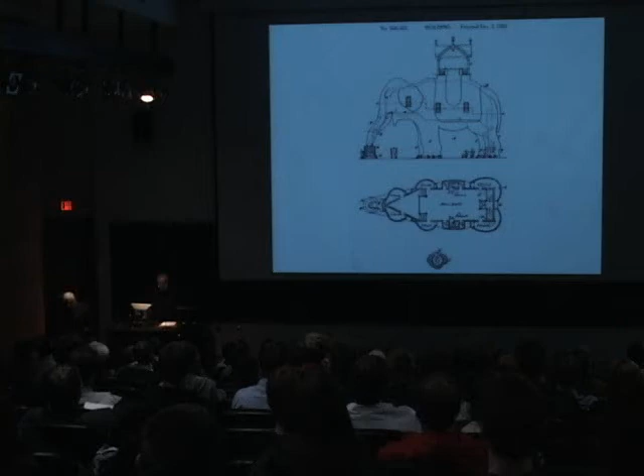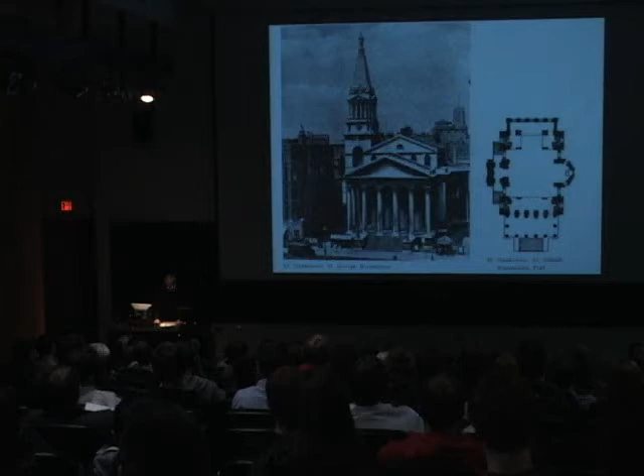And the keystones, just to mention a few of the elements. The density is undeniable as they're all vying for the same place. The action is also severe as the temple is skewered by the church. The triumphal arch is squished by the treasury and the pyramid. The church walls are bent. The temple walls are compressed, and the center is popped up—so there you see the center being popped up. Even the keystones pop up.

If we look inside, we see all the issues again: the horizontal of the temple running this way, the vertical of the church running that way, the compression of the church. So we see the nave windows, which are bent around the corner because the church has been compressed that way. And in case we don't really believe it, we also get the reading of the temple on the ceiling, with the nave and the side aisles in the piece of stucco.

Underneath that piece, Chareau's Maison de Verre is the same game, different stuff. This time it's industrial stuff that has been manipulated and jammed into the corner under an existing third floor. It's a frozen Chinese puzzle of L's. Like St. George Bloomsbury, the bits often act in more than one scenario. For instance, the service wing is both the front facade bent around the corner and a piece of apparatus pulled from the house.

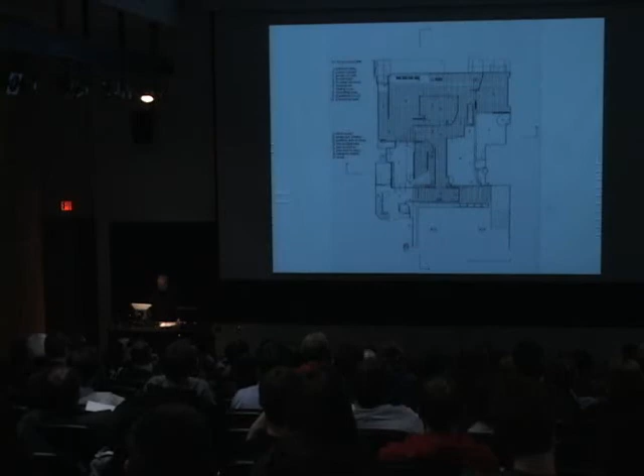However, the real story lies in the difference between the translucency and transparency, the making of a symbolic city, the utopian projection of industrialized standardization, the development of an architectural vocabulary, and the illusion and actuality of mobility and the ultimate machine for living.

With Venturi's mother's house, the stuff is reduced to an eclectic array of architectural elements jammed together. The picturesque house front, the chimney, the dado inside and out, the graphic arch with the traveling window, so this window which has been relocated from over there, the strip window, the large and small punched windows, and the picture window. The picture window is this big window back up underneath the entrance.

On the back, the Roman window on top and Raphael's Palazzo shop fronts and the modernist voids, the suburban sliding doors are further indication. The stair to nowhere, the garret attic, the oversized fireplace with too thin mantle, and the compressed stair, the offset front door, most of it in motion. They are elements playing in multiple scenarios, packed in, slipping, and sliding.

The Kimbell Art Museum is at once the Baths of Caracalla and a railroad yard, Versailles and a Texas warehouse. If we understand manipulation as a kind of organization, the Kimbell has it in spades. The repetitive vaulted spaces are anything but: chopped, compressed, emptied, and dropped. Front to back, the ABA represents the old. Side to side, the 120-foot span is all about the new.

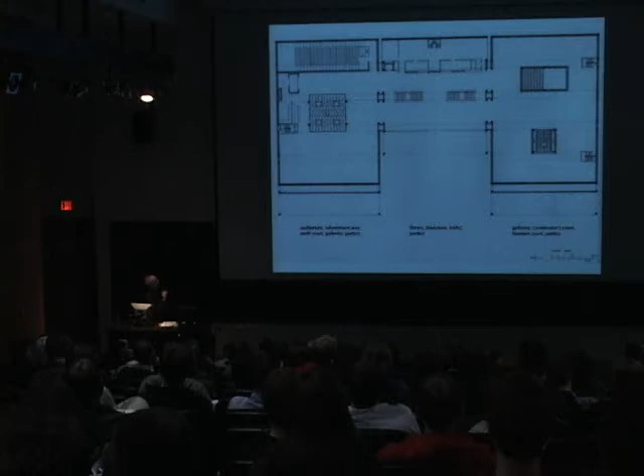The courtyards are another elaboration. Objects in a field, small, medium, large, extra large, compressed and stretched, all glass, no glass, half glass, single and double story. So the courtyards are small, medium, large, extra large. There's the glass on two sides, solid all the way around, glass on all four sides, and sort of open. So again, the whole sort of elaboration of them. Service and served are at once adamant and blurred.

Stirling's Stuttgart Staatsgalerie is all about shock, a history of architecture, the eddy effect, center to edge, front and profile, big and small, grand and informal, bent bars absorbing the neighborhood, and dare I say, the Rockettes. The multiple centers, the folded walls, and bits of context absorbed, the historical puns all contribute.

Then there's the separate routes, the two routes for the neighbors through the site, the promenade along Adenauerstrasse, the entrance processions to the museum and the theater, the museum procession with attachments or exits, the garage sequence of service routes for the museum and the theater, and the curtailed administration and cafe accesses. So, they're basically jammed into the plan.

But for instance, the sequence from the street up to the museum entrance, and then through the museum entrance, up the ramp, round to the galleries, and then back around that way would be an example of the elaboration of a route.

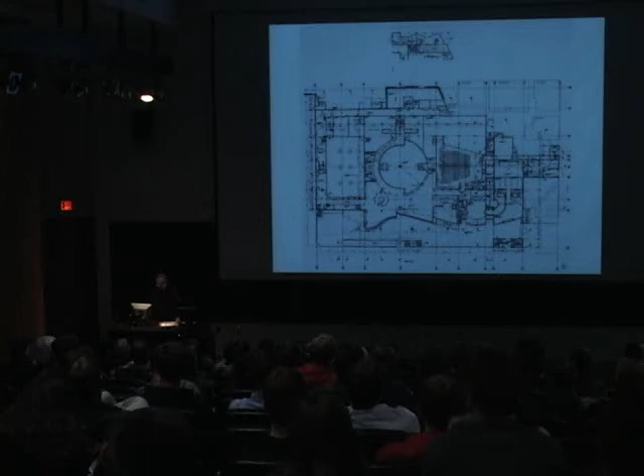Koolhaas's Villa dall'Ava continues the themes of density, action, and logical consequences. For density, it is at once a chopped-up Villa Savoye and a country estate packed into a Parisian suburb with a house and garden overlaid on each other, and the conjugation of elements or episodic essays, for instance, the stairs, which come in many different forms.

For the action, there is the geological shift. So we get the sort of stone layer, underground river, and then a dirt layer with the roof garden on top. The side-to-side compaction, the front-to-back slippage, and the garden wall, just to mention a few. So for instance, this is the garden, or the way the house really works from city to garden is this way, with this wall which has been wrapped up around, little garden door back behind the wall here, moving that way.

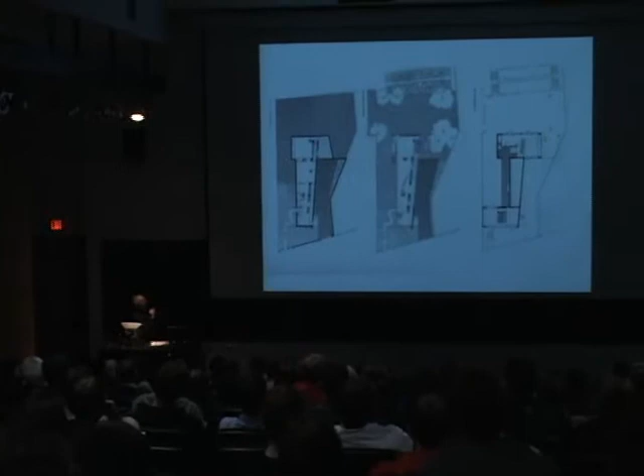For logical consequences, there's the deceptively simple plan with the living bar, the two bedroom wings, the transformation of the ABA to an S diagram, the balancing of the push and pulls. So here is what would normally be two wings or two pieces which, pulled out here, have been slipped this way, transforming the ABA into an S diagram.

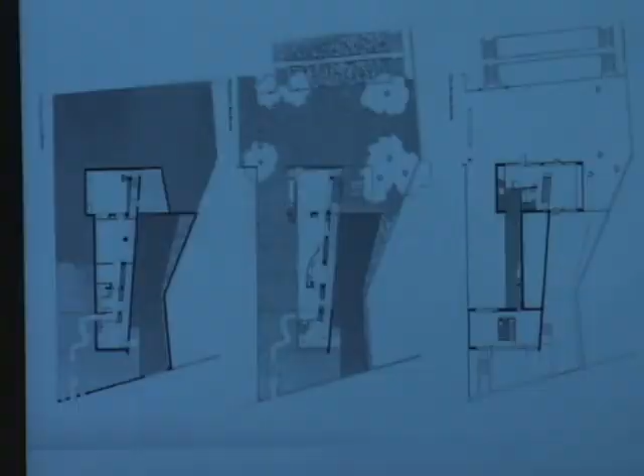And then finally there's the simple, inexpensive applied materials both to articulate the differences and make the house accessible. My work continues the themes, or this way of seeing the world.

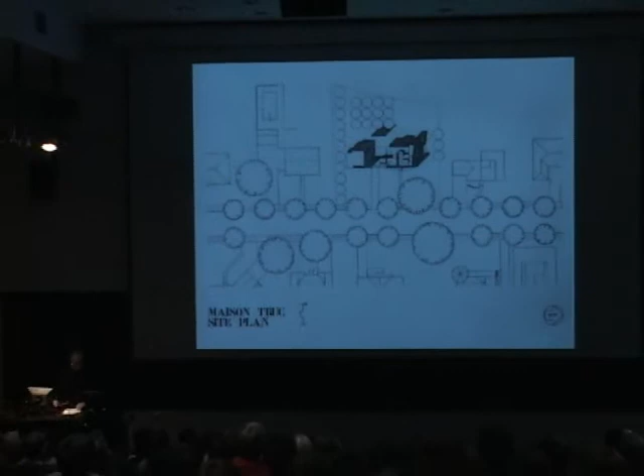Design is a prototype. This was a house done in the 70s. At the time, Corb was big, so these are the letters that Corb used. Truc, objects were big, so everyone was talking about objets in French. But in fact, truc means trinket, so it's a sort of crummy little object.

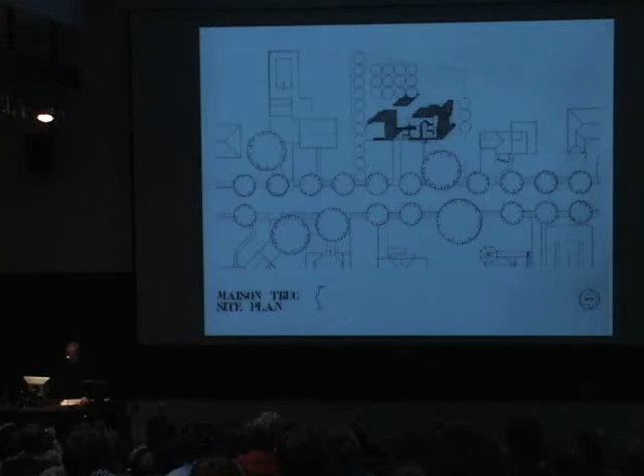So Maison Truc is all about that. Designed as a prototype for suburban living, Maison Truc reevaluates the optimism that accompanied the early 20th century industrialization. The modern movement presumed an impending revolution in domestic life that failed to occur. And with that failure, the utopian idealism of those years had to come to terms with a prevailing cultural disposition towards an easy way. The benefits for the whole were replaced by a misguided conception of individual freedom.

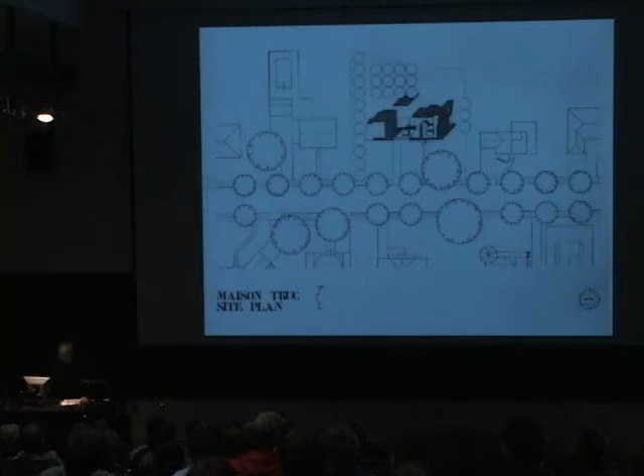The image of the truck updates earlier romantic images of trains, boats, and planes. Technologically ordinary rather than new or outstanding, the truck admits to no ideal. It's just a pragmatic way of getting something from here to there. However, as perceived on the open American road or as applied to the house, it can be mined for its elemental quality. In its most literal sense, the truck is a representation.

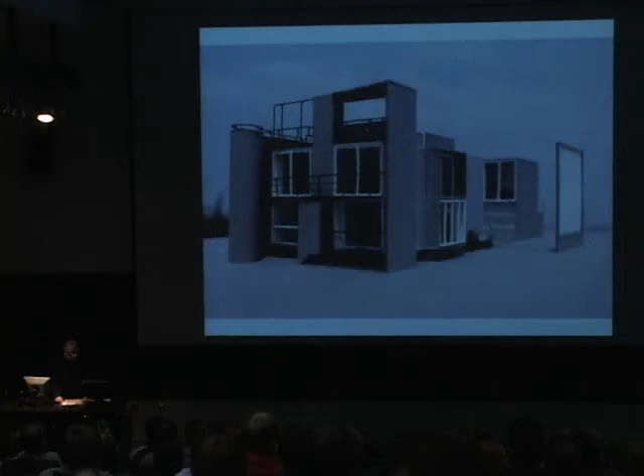The truck is a representation of portable space that is cheaply mass-produced. Independence is its ideal, and transience is its reality. Instead of a larger house with an emphasis on comfort, the truck box establishes a smaller house with an emphasis on content. Content is both particularized space and artifacts. This truck is all cowboy. The champagne and silver slippers of the 20s and the glories of the Castle Walk have been run over by the Marlboro Man.

Anybody here under 40 who knows who the Marlboro Man is? That's good. Anyway, in the 70s, Marlboro cigarettes were sold by the Marlboro Man, who was a cowboy. Anyway.

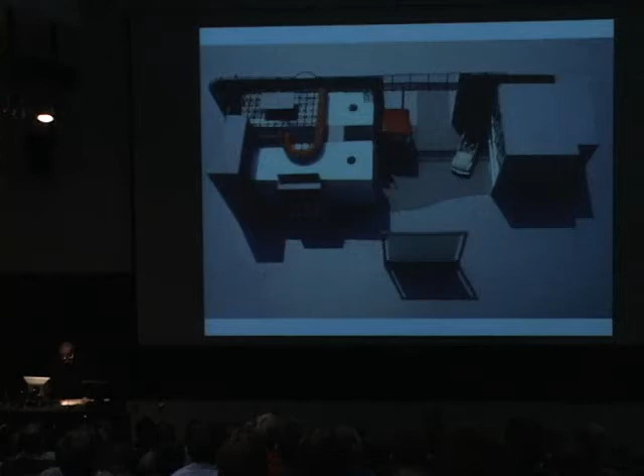Little space, more character, house functionaries are caught up in another story. Thus, the diesel exhaust vents the oven. The cab is a breakfast room with a hydraulic table. The cab grill is the projector for the outdoor movie screen. So the projector pulls out of here and shines on the outdoor movie screen. The powder room is an oil drum. The coffee table is a skid. And you'll see the coffee table again.

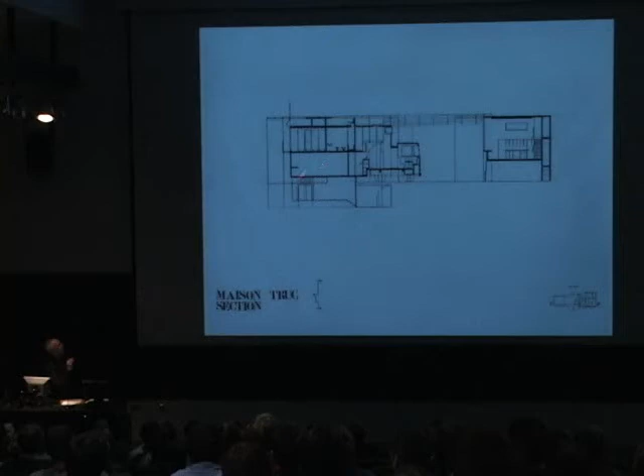The bedroom closet is 7th Avenue push carts, and the trailer wheels describe an ionic column. So here are the 7th Avenue push carts for the master bedroom upstairs, and then down in the basement, the wheels are the capital of an ionic column. However, lest one lose all association with house, there are also the compressed elements from stately homes. So the ping pong ball catcher is at once a cornice and a Baroque balustrade. The roof handrail bulges to a Tuscan oil drop.

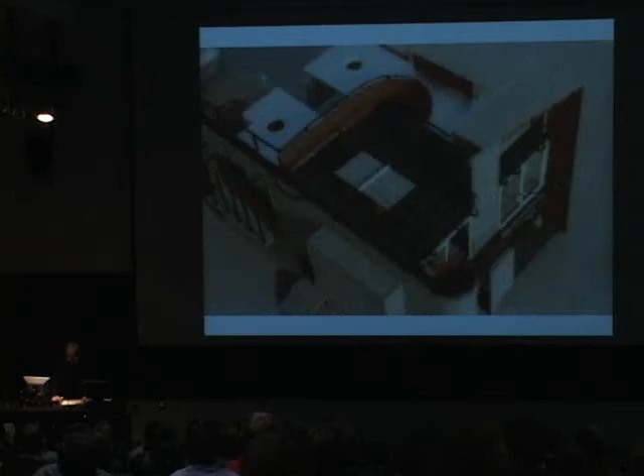Tuscan oil drop is actually this piece, and they put them in Tuscan castles for unwanted visitors. So when your enemy arrived, you poured oil on them, and that was the end of that. Anyway, the projections on the street elevation are scaled Renaissance balconies. As a shield from the street, this truck stop facade defers to the neighborhood. The exposed cab confers the caprice of mobility on an otherwise stable object.

The view of the truck cab through the driveway entrance gives a hint of the other world behind the facade, where the trailer and cab contain the real and everyday entrance. The street door has an unusually high genuflection sill that interrupts the ceremonial entrance by making it difficult to get through. So as people are ducking and stepping to get over, they get the oil poured on them because it's a suburban entrance, which of course we know that nobody enters from the street.

Besides its obvious statement about suburbia, this gesture also is an introduction to a series of events that attempt to make explicit and therefore accessible some architectural considerations of procession, alternate route, and urbanism. By hiding the entrance function of the ceremonial front door, one is forced to understand other actions, such as the bowing before the temple house. The fire pole, slide, ladder, stairs indicate that alternate route is more than processional and service or inside and out.

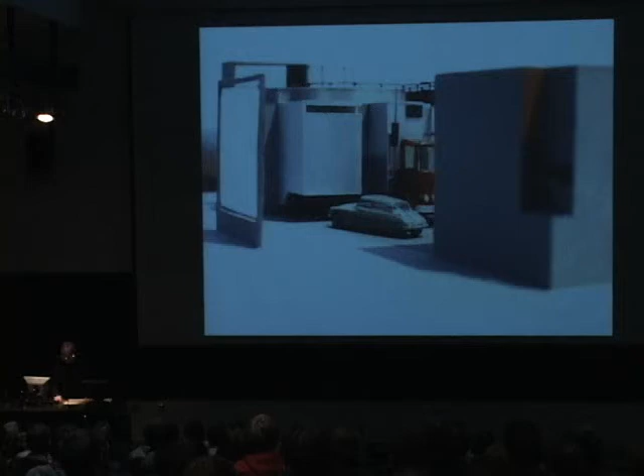As the objects assume a preference for legibility over squandered image, space is defined by a particular shape over spatial largesse. Thus, the kitchen and study are characterized not by their size or content, which are essentially the same as the appliances and furniture have been generalized. They are distinguished by the distortions, actions on or contradictions and extensions of the space.

The kitchen is bound on three sides by glass projection to the street, the gallery of the upper hall, and the sunset tube of the diesel exhaust. On the other hand, the study is only relieved by the constricted slits in the facade that you saw before and the circular skylight. So making equivalences between those two things.

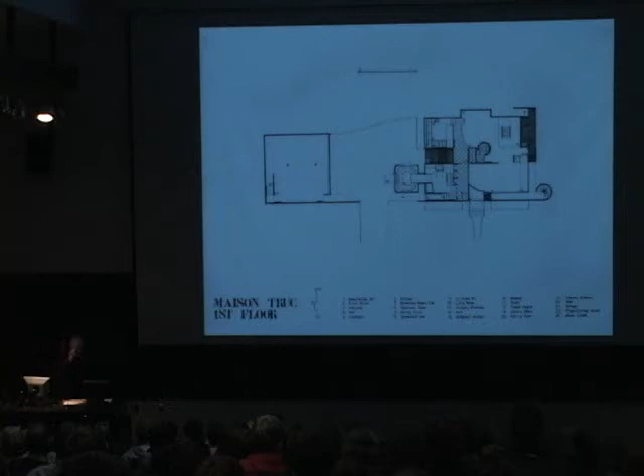The living room is only distortions: the oil drum, the narrowing of the hall, the study step landing, the compression from the platform, and the rotation out into the garden. The extent. So if you were to try to describe or inscribe the living room, this would be its shape. So it's saying that it's not a very big space, but it has lots of character by the shape of it.

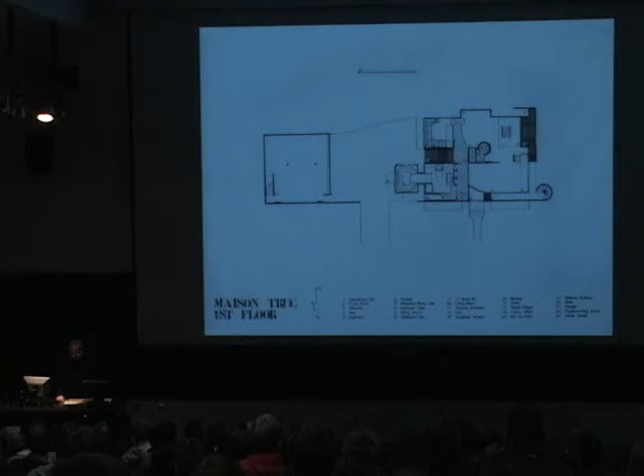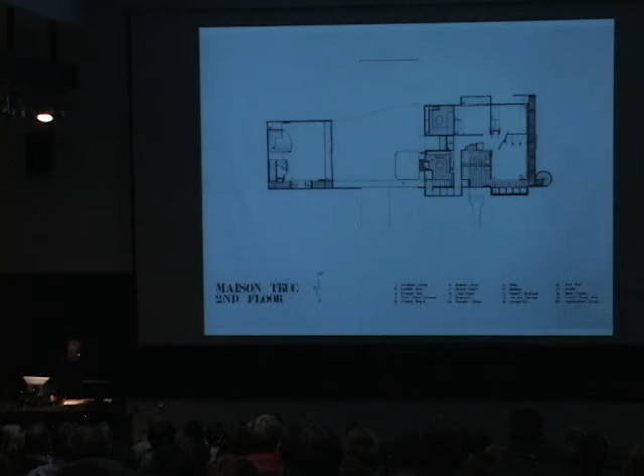The dining room and the extension of the dining room sideboard all give the space a configuration that can be identified. The studio garage is an intermediate step between the 20s and now. So there you see that so-called compressed corner, which was pushed down here, which would cause what was once a flat wall to be sort of curved out into the space. It's a box and the packing in which the Truc house arrived. The Truc fragments, the piece of the kitchen, the guest couch are part of a contemporary cubist composition and exist in contrast to the complete images of the post-cubist Truc house.

This is the Solow townhouses done with James Stirling. I worked with him in England and then came back and taught with him at Yale for a number of years, and then for a while ran his New York office. And this was a competition done for Sheldon Solow, who has the 9 on 57th Street, the building with a 9 in front of it.

Anyway, he did a Miesian glass, 40-story Miesian residential tower on 62nd Street and 2nd Avenue in Manhattan, and put a 2-story parking garage behind it on the side street, and then asked Richard Meier and James Stirling to do a competition to give him ideas about how to put townhouses on top of it. Basically, I did this, but it was Jim and I working together.

For the developer, there were 2 issues. The structure of the townhouse needed to approximate the 18-foot bays of the parking garage. So as one walks along the street, here's 18 feet. So this is actually 36 feet. So the structure had to come down on the columns, essentially, of the parking garage below.

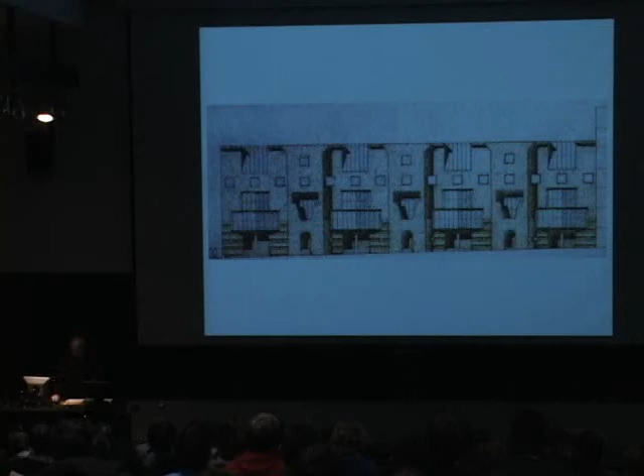The other is that it was luxury housing. Luxury houses meant big entertaining spaces and lots of amenities, including things like private elevators. So the big entertaining spaces was like a living room of 18 by 36 feet, and then a fair-sized dining room to be able to entertain. Stirling wanted to emulate the idiosyncratic character of the Upper East Side townhouses, which is what you see there. I wanted to play off the character of the designers. Stirling was what we might call robust.

And believe it or not, I was trim. What developed were fat guys and thin guys. The advantage of the fat and thin was all the units could have their 18 by 36 foot living rooms. So here they were, and this is the first one.

The fat guys were 2 units, a lower unit of 3 stories and an upper unit of 2 stories, and the thin guys were 5 stories. So the lower one has basically that configuration with an outside garden, maids' rooms and all that kind of stuff. And then the upper maisonette just had a little entrance hall with an elevator and a stair up to the top. The thin one came into an entrance hall, maids' rooms, garden room.

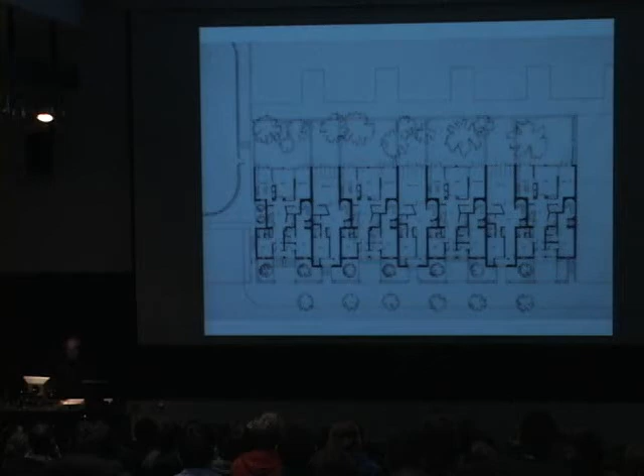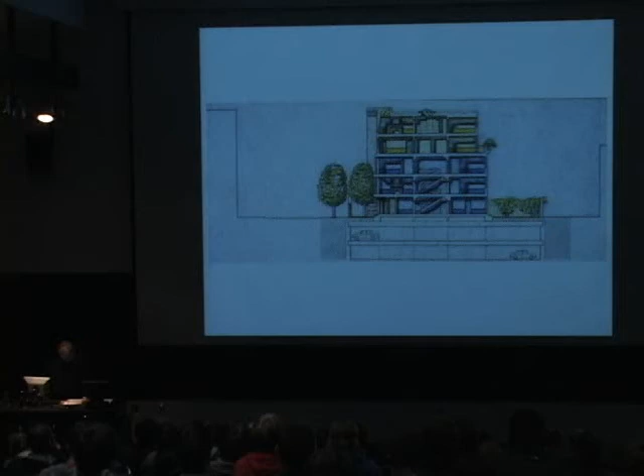But the real advantage was in the thin guys, that by pulling the circulation out of the thin one, we were able to get the 18 by 36 foot living rooms deep into the building. So here they are on the lower level of the fat guy. Here they are on the thin guy, and then here they are on the upper part of the upper maisonette.

So the upper maisonette, you would go all the way to the top and then come down a floor to the bedrooms. On the lower unit, you came in at the lower level, came up to the living room, dining room, kitchen, and then up again to the bedrooms.

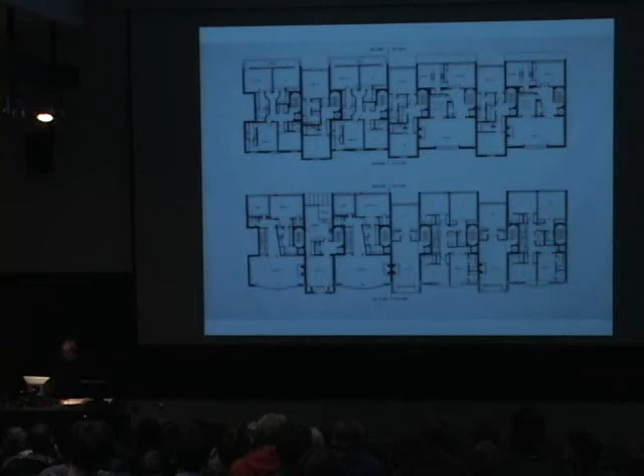Within the units, the served spaces were emphatically shaped and reiterated. The service spaces are clearly poché and carved. Roof lights provided light to the stairs and studies. On the street, bow windows, artist studio windows, balconies, and gardens help to articulate the difference and give the units character and identity. On the inner block, facing south, the building is more unified, contemporary, and glassy.

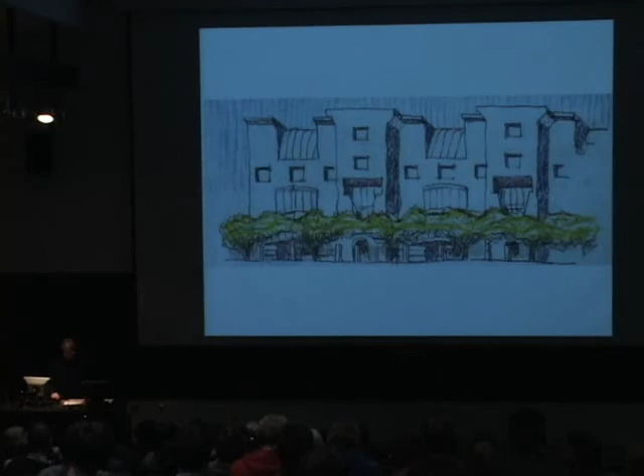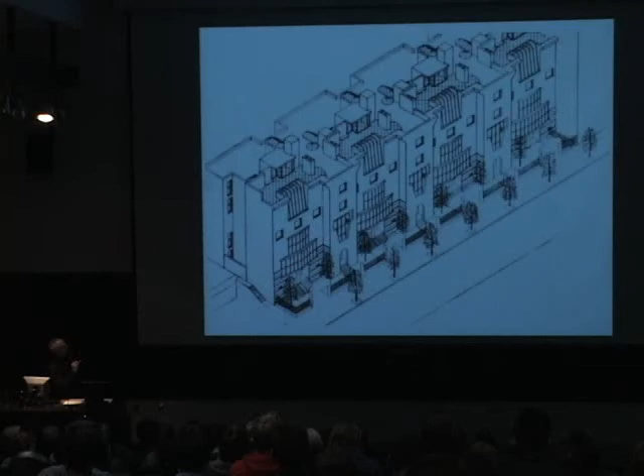Stirling and I had one disagreement. I wanted to use the garden as an amenity and therefore give the maisonettes roof terraces. He'd have none of it. So I did this drawing anyway, which is to put the little roof terraces up. So you come up to the main floor of the upper unit and you can come up to your outside space or go down to the bedrooms, and then these are the bedrooms to the lower unit, its big living room space, and then the entrance to both of them at the ground floor.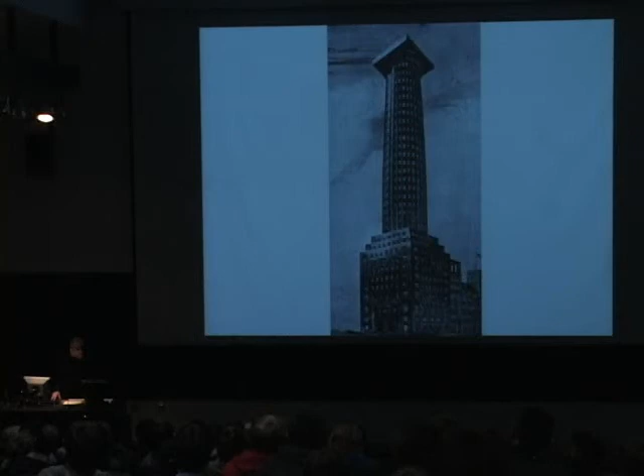In 1922, the Chicago Tribune held a design competition for its headquarters. Entries came from all over the world, and in fact, second place prize money allowed Eliel Saarinen, father of Eero, to immigrate to the United States. This entry is by Adolf Loos and one of the more radical entries. In 1967, Claes Oldenburg did a late entry to the Chicago Tribune competition.

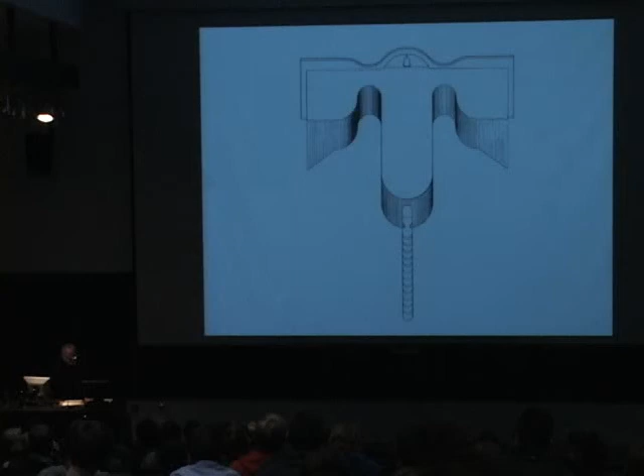Picking up on that theme, in 1980, Stanley Tigerman organized an exhibition called Late Entries to the Chicago Tribune Tower Competition. He invited 100 architects to participate. We were only allowed to submit one image of the canonic view. The only trouble was that Tigerman had also just produced the Daisy House. So my entry was to celebrate the original competition, to acknowledge the popular imagery of the Oldenburg entry, and to recognize the infantile humor emanating from Chicago at the time. Stanley didn't talk to me for 5 years.

The Baum residence was for a plastic surgeon and his wife. This is on Fairfield Beach, Connecticut, and these are all little tiny ticky-tacky beach houses. You would barely believe that they could survive. The doctor and his wife had a house in Fairfield and had a house on the beach. What was unique about what they had was a double wide lot. And so they wanted to sell the house in Fairfield and move here full time.

So when I was thinking about this, oh, and by the way, they also wanted to be able to accommodate the families of their grown children and allow their friends to use the beach without entering the house.

The street elevation refers both to the singularity of the McKim, Mead and White Low House and the stateliness of the Baums' former suburban residence. The beachfront emulates the scale of the adjacent ticky-tack beach houses with architectural fragments that have been washed ashore. So here is the potter's shed from the estate down Long Island Sound, the Temple of Poseidon from Sounion, Greece, a Georgian porch washed up from Georgia in the last hurricane, and the lighthouse which actually exists out in the water beyond.

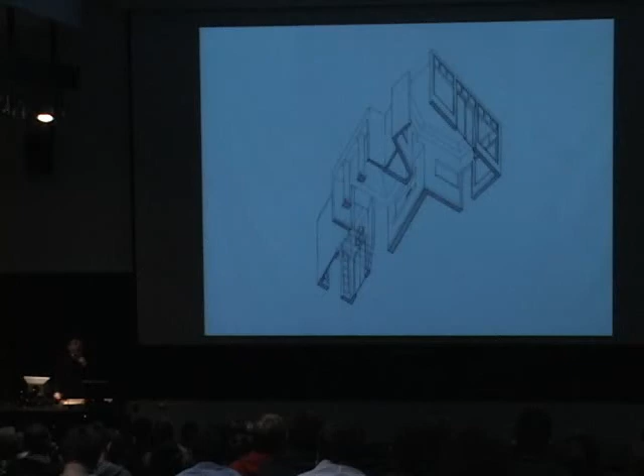On the second floor, the architectural allusions are in the master bedroom sound lock, which was to separate the doctor and his wife from their grandchildren, which were back there. And the Louis XIV alcove. So in Versailles, Louis XIV would sleep on a bed with side curtains because it was so cold and they didn't want to have to heat the whole place. The same is true here facing the Sound; the alcove begins to act like those curtains.

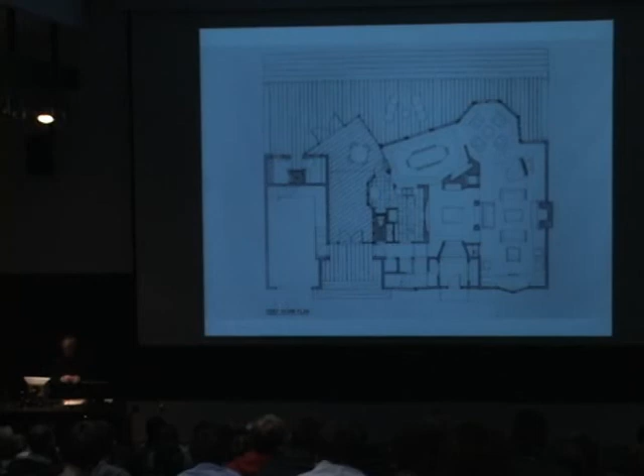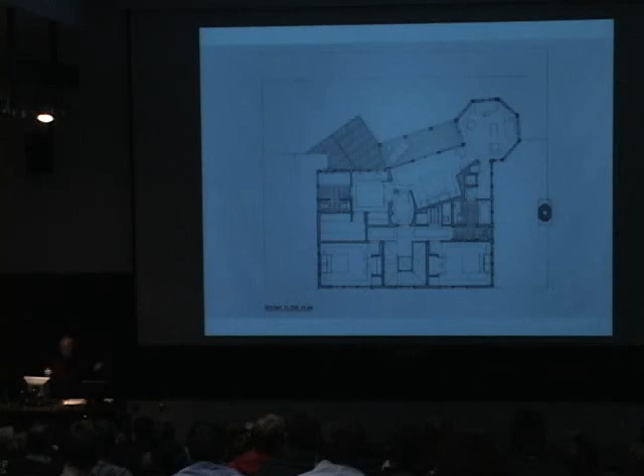More playful references are made in the, if we go back, oops, wrong way, in the sort of fried egg linoleum floor in the kitchen, the soap bubble linoleum floor in the laundry room, and the deck, the jacuzzi with a view, which was a must, and the lookout on the third floor, which is accessed by the elevator over there. He wanted an elevator for when he retired so that he would still be able to get to the second floor after his first cardiac arrest. Anyway, there's the tower lookout on the third floor.

This is Columbus State, actually done with MBBJ. It's Harold Nestor Hall at Columbus State. Because the campus is a somewhat deadpan 60s architecture, Nestor Hall cannot exactly fit in. The best part of the campus is the original quadrangle, which is over here. Nestor Hall forms another courtyard at the end of a vestigial administrative axis and marks it with a student lounge, simultaneously juxtaposing students and administration and elaborating both the organizational and the nascent attributes of the campus. So the idea was to make another courtyard here. This is the administration building, and to put the student lounge at the far end.

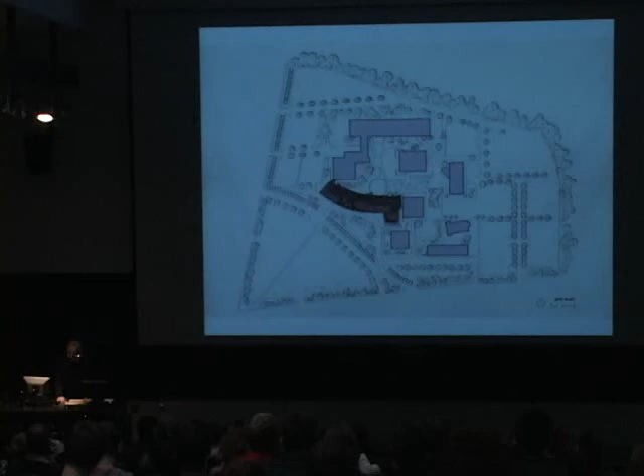The other thing that pulling the building back like that does is cut off the view to Nationwide Tower, which is down that axis and not so cool to look at, and then turns the building to face the Board of Regents. So the formal front facade is very much about being respectful to the Board of Regents, but allowing something else to happen inside. The game is played out in multiple centers and edge reversals and the expansion of the material palette. The result is meant to be a building that is comfortable in its context, but in no way limited by it. As a Baroque or Broke ensemble of numerical, material, architectural, and programmatic elements, the building attempts to resolve the conflicting energies bearing on an urban academic center without taming them into genteel submission.

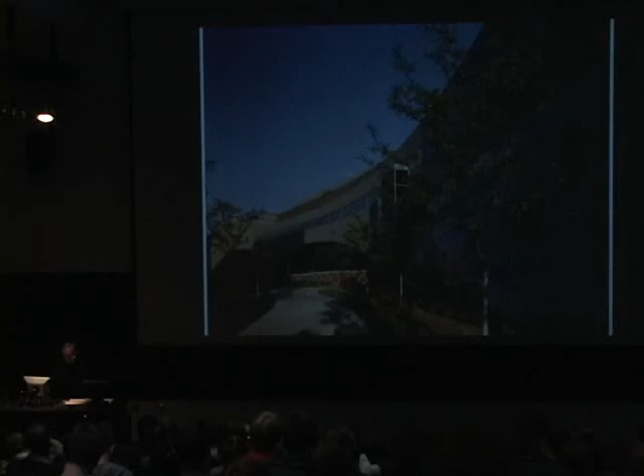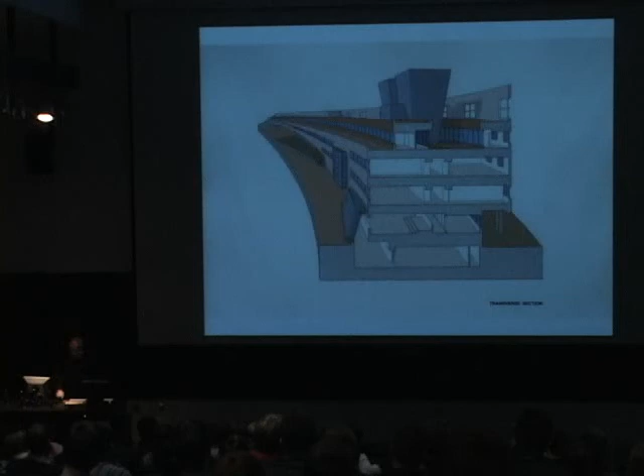It's a classroom building with faculty offices, student lounges, so faculty offices are up here, classrooms there, student lounges here, and a conference center at the lower level, and a performance space, a performance theater. The building is the center of the campus and a gateway between town and gown. The massing of the building is a non-ideal curve that sutures the overall campus grain to the urban context. The sculpted elevator shafts, arches, theater masses, rotated ramp, and bulging glass express the feral forces operating within the building.

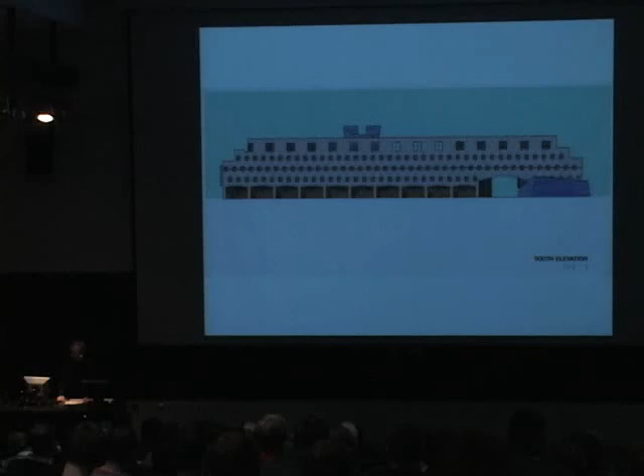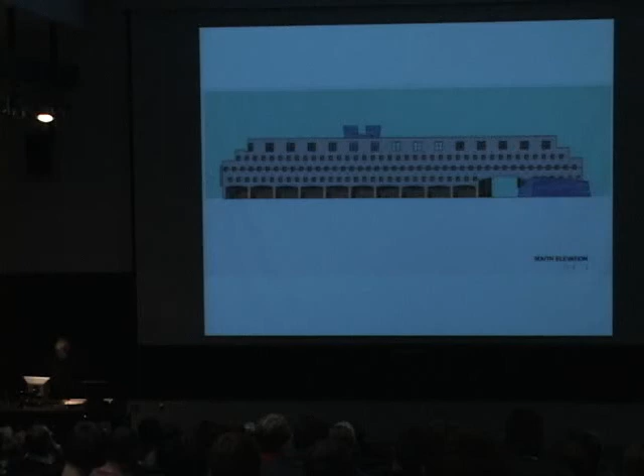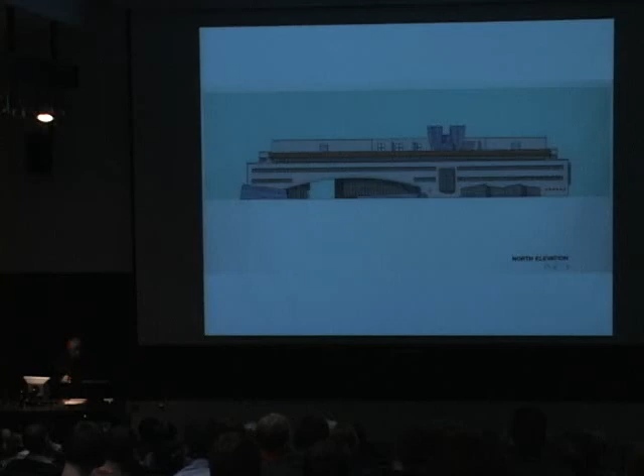The windows, as an emblematic elaboration of architectural elements, are choreographed as sometimes carefully proportioned, quartered, quadrupled, gridded, stripped, demullioned, punched, bent, and finally laid horizontal to rest. So on the front, you see the carefully proportioned and quartered and some of the broken strip and little bits of the grid. On the back, you see the grid, obviously the very strip windows, the quartered windows, the demullioned and compressed windows, and then over here on the roof by the theater is the one that becomes a horizontal skylight.

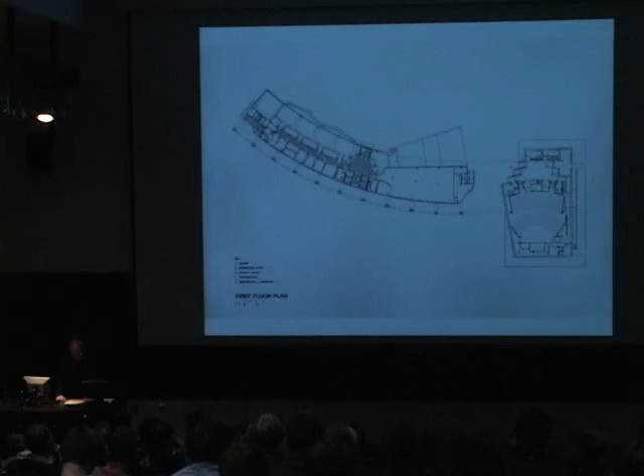The primary material of the exterior wall is the campus beige iron spot brick. However, it's studded on the south elevation and elsewhere augmented with patterned red brick, polished black granite, and spotted corrugated metal. The numerical order is constantly changing. The building is at once 10, 12, and 14 bays. The curve has pulled the pieces out of alignment. On the south elevation, the louvers, arches, and windows each march to a different drummer. The diagonal pattern of the studs stitches them together. The structural bay is 6 modules, but the room pattern is 4. When the systems align, they mark an event.

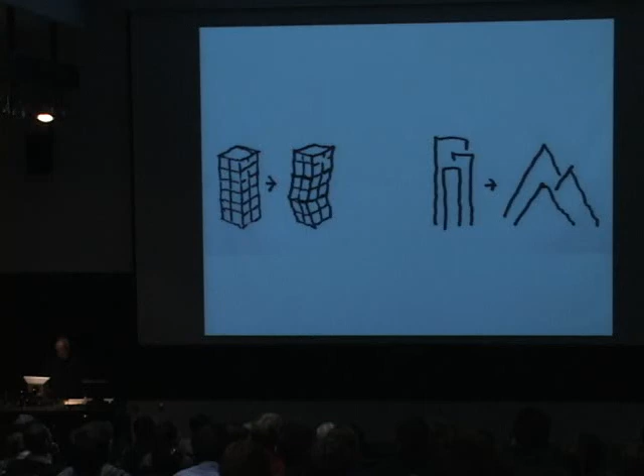And the result is a faceted blue glass sliver tower with the Austrian flag on the front. The waving flag articulates the cultural threshold between New York and Austria.

When one comes in, you find the Austrian bits around: there's the Viennese lobby, the shattered or rocky mountain gallery, the Viennese opera house, and the very carefully detailed wood, as in a Viennese theater, a little theater there.

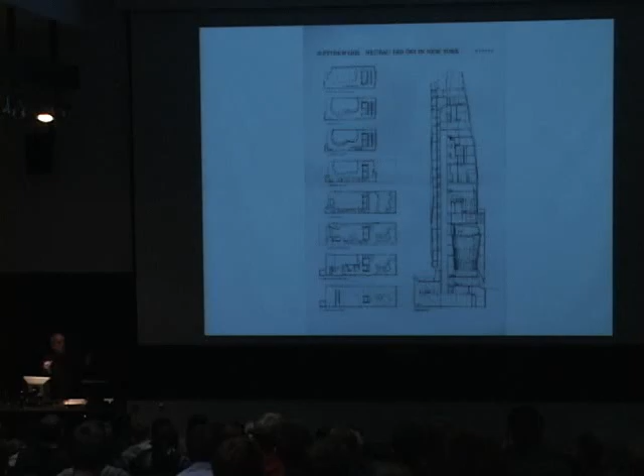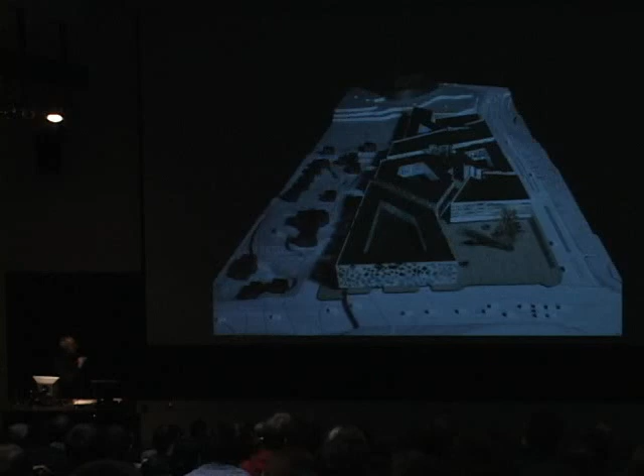The library is the academy brought to Manhattan. The hotel has its entrance directly off the street. You can pull through, and then parking underneath the hotel and underneath here. The only other thing to point out is the arena, which is on the way to the campus.

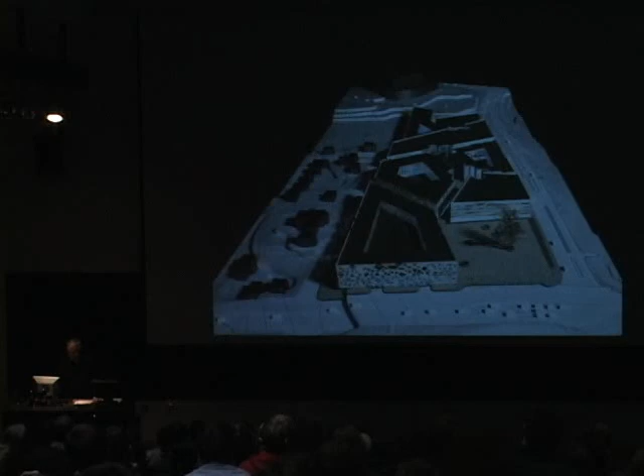The scheme is generated from the possibility of exaggerating the utility right-of-ways into pedestrian paths and light and air passages. There were two places we had to stay off of: an underground gas line running through the site, and a high-tension, high-line electrical line running across the site and then up that way.

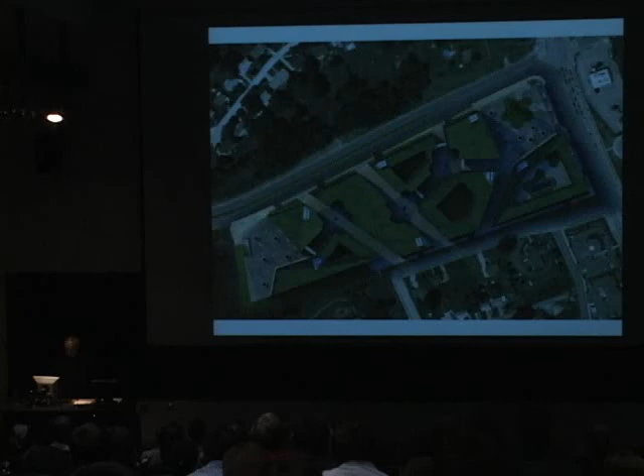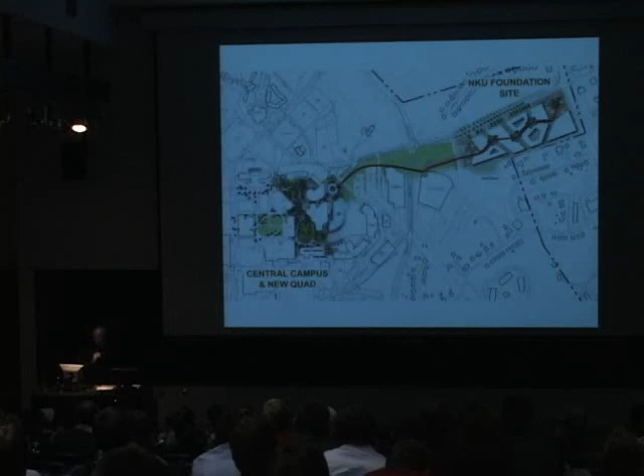The idea was to figure out how to make those two constraints into a system, something more than just scars on the ground. So we asked, if we have those kinds of cuts through the site, could we have other kinds of cuts through the site? And could we connect the existing campus back up to the main street of the town through a pedestrian passage which would go up through the complex?

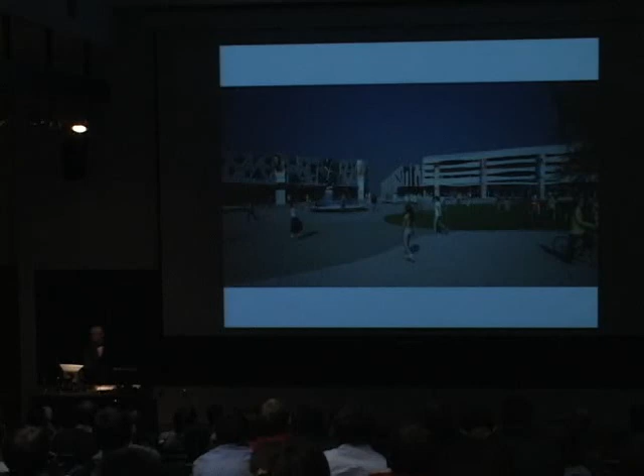So this is the entrance from the town to the gown. These little pieces are skylights, or holes open to the parking garage below. This was a site with a wonderful old home on it that they tore down, which was the alumni house. So the idea was to keep the tree, symbolic of the old alumni house.

Looking along the retail on the upper plaza, and working our way down through the complex, again the transportation and the plaza. The plaza, both this one, which would be for rallies in the town, and the plaza closer to the arena for rallies, and then the little flower courtyards you find as you work your way down.

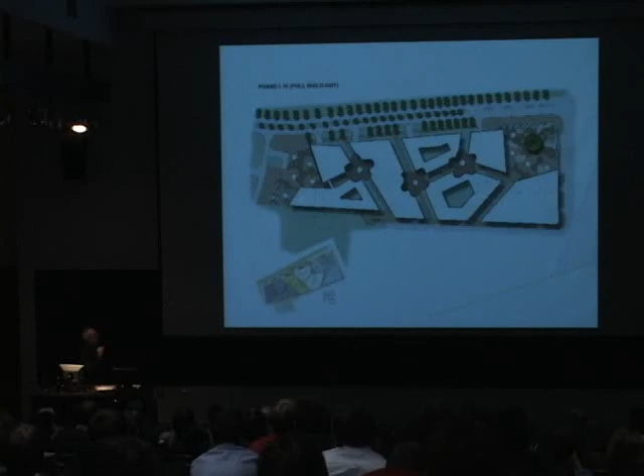At the lower end of the site, the passage continues up through. I neglected to mention there was a 45-foot drop across the site, which gave us enormous opportunities. Then the green walls facing south, and the green roofs, emblematic of the interest in technology and sustainability, the kind of companies they were trying to attract to the area.

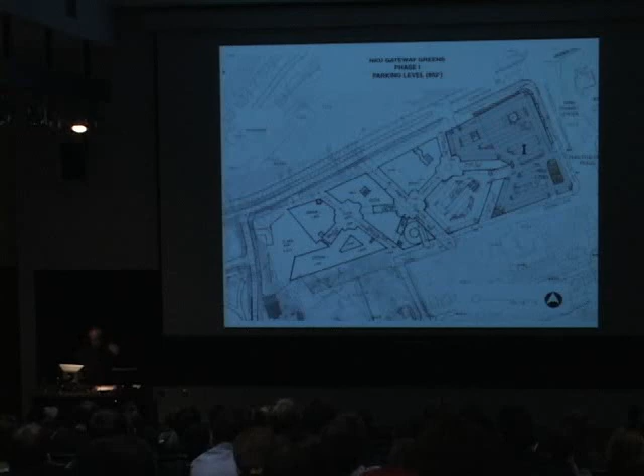So you see the paths have many variations where they pass under or around the buildings, and the whole apparatus of the parking, so that it not only fed up to what was above it, but could feed directly out onto one of these little plazas and into an adjacent building. This is the same idea, with parking feeding out to the second floor of the buildings here because of the steep slope of the site.

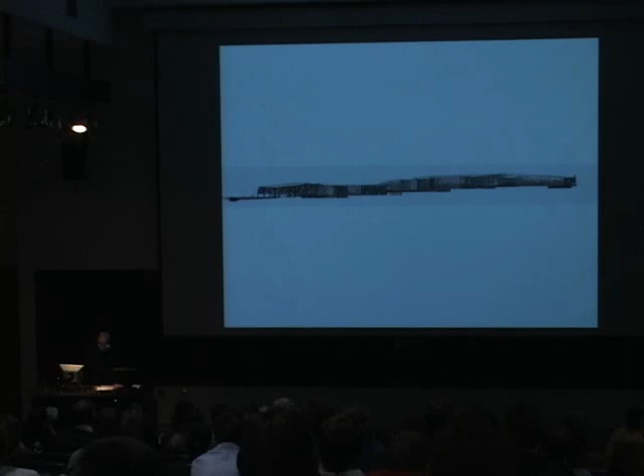There was a zoning requirement allowing only 3 stories at the edge of the site, but as you moved in, we thought you could move up, which is why you get that wavy form of the building. So there it is: 35 years of struggling and loving architectural stuff.